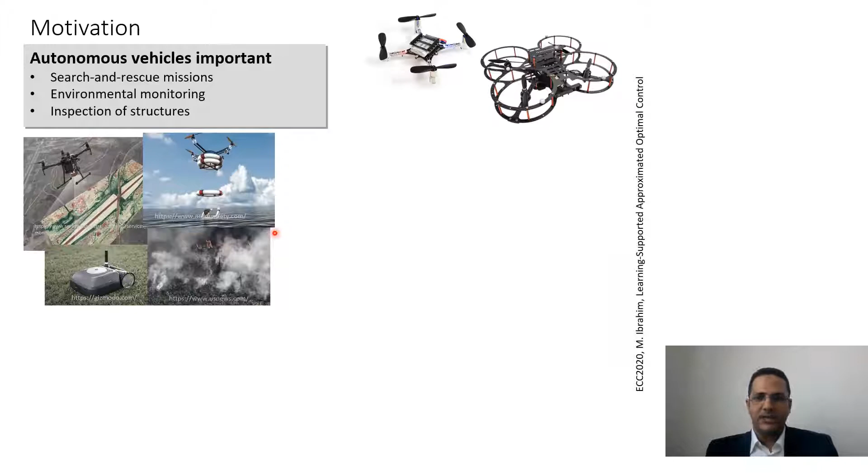Autonomous vehicles, for example unmanned aerial vehicles, are used for many important applications, such as search and rescue missions. For these missions, we need to minimize energy consumption due to battery limitations, while also taking into account vehicle dynamics and constraints. So we propose optimal control.

However, in these applications there are many challenges. As mentioned at the beginning, the common problem is disturbance, for example wind disturbance. Ignoring this disturbance might lead to instability of the control system, in addition to the low computational power of the autonomous vehicle. To consider all these aspects, we propose a learning-supported approximate optimal control approach. I will explain how these aspects are considered.

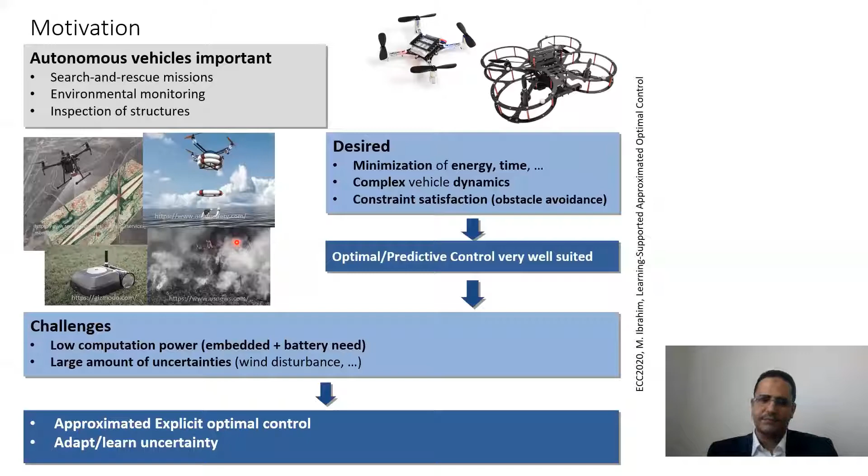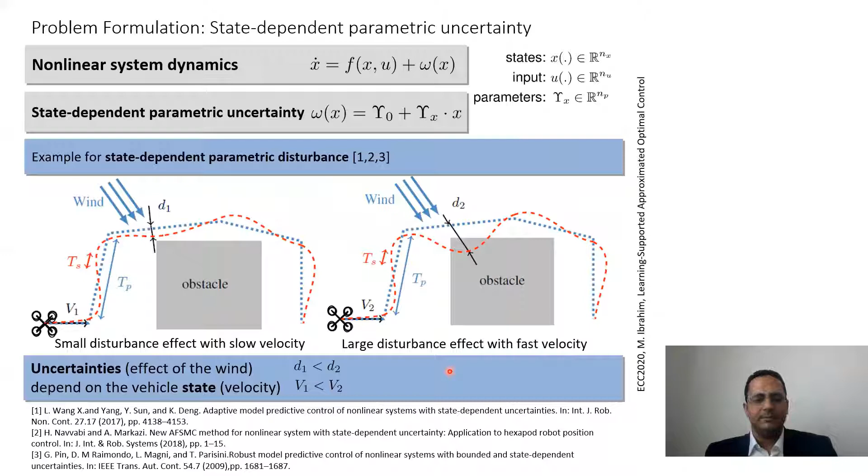In this work, we assume state-dependent disturbance based on a realistic scenario. For example, when the autonomous vehicle is moving with low velocity, the wind effect is less than when moving with fast velocity. So the disturbance depends on the vehicle velocity.

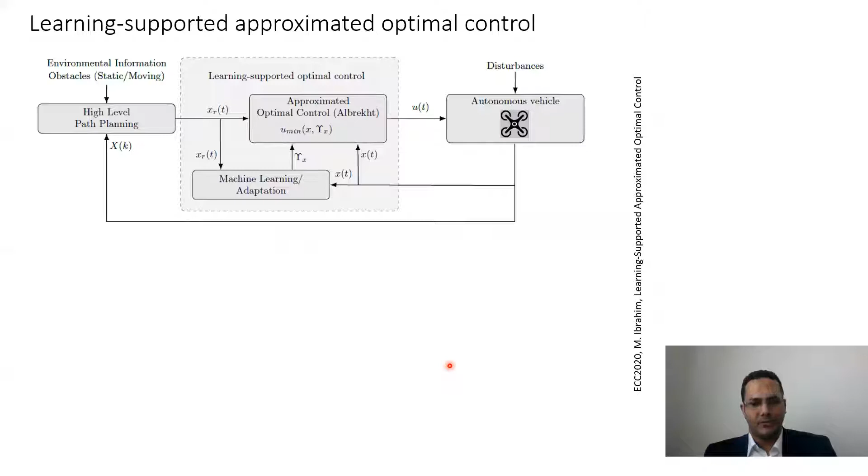To achieve all these aspects, we propose the learning-supported approximated optimal control approach. The main idea is to derive an explicit solution of the optimal control problem using series expansion approximation based on the Al'brekht method.

Considering nonlinear vehicle dynamics, this explicit solution, which is just a state feedback control law, is applicable for real-time implementation, and this control law can be validated. Also, to decrease the impact of disturbance, the controller is defined as a function of disturbance parameters, which are learned online. So how is this explicit solution of the optimal control problem calculated?

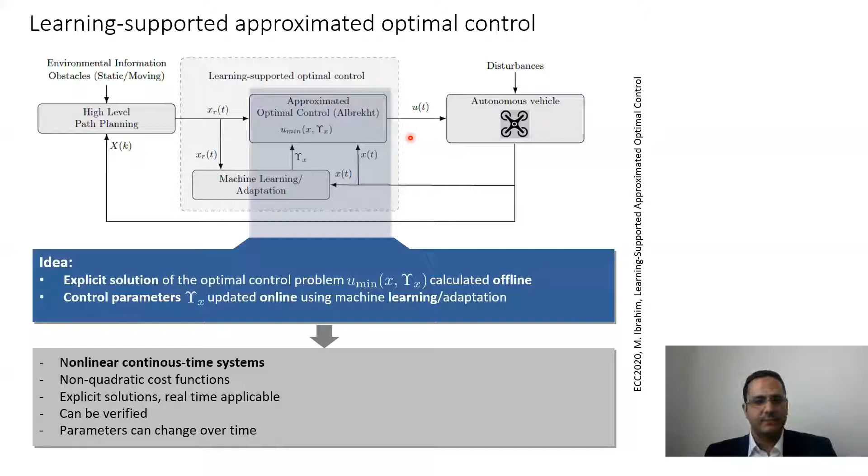Solving the optimal control problem is computationally expensive and challenging to implement on the autonomous vehicle. So we propose to calculate an explicit solution of the optimal control problem.

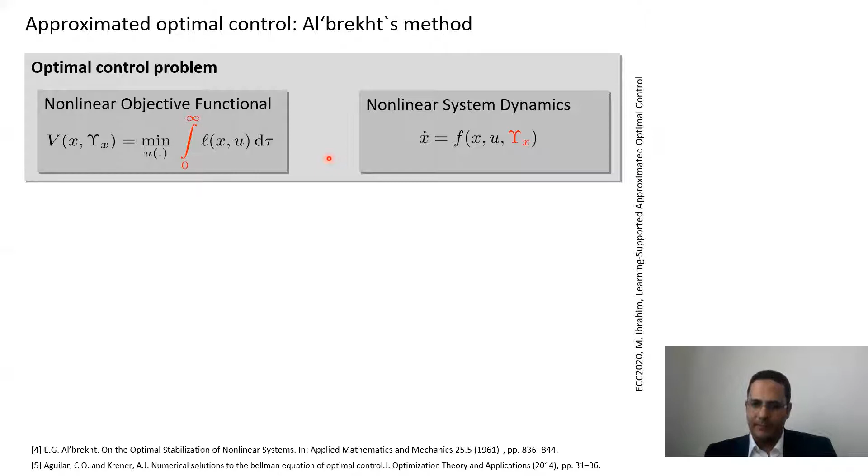Both the cost function and the vehicle dynamics are approximated using power series expansion based on the Al'brekht method, taking into account some conditions and assumptions. The solution accuracy depends on the approximation degree of the power series expansion. So how is this explicit solution calculated?

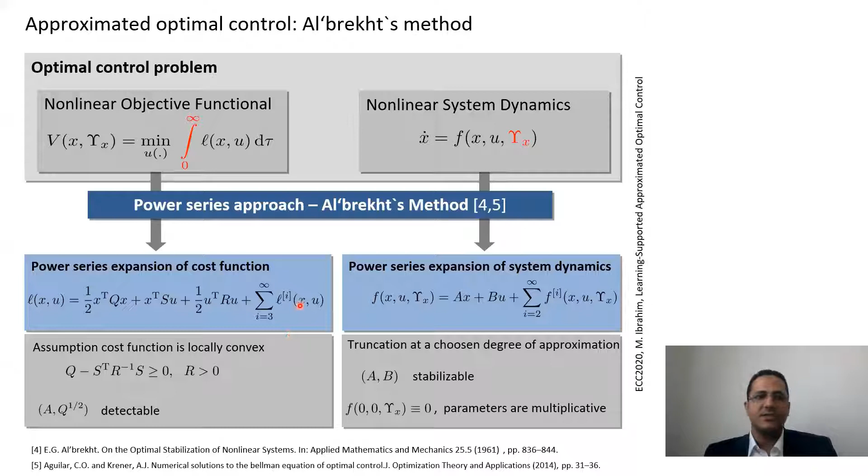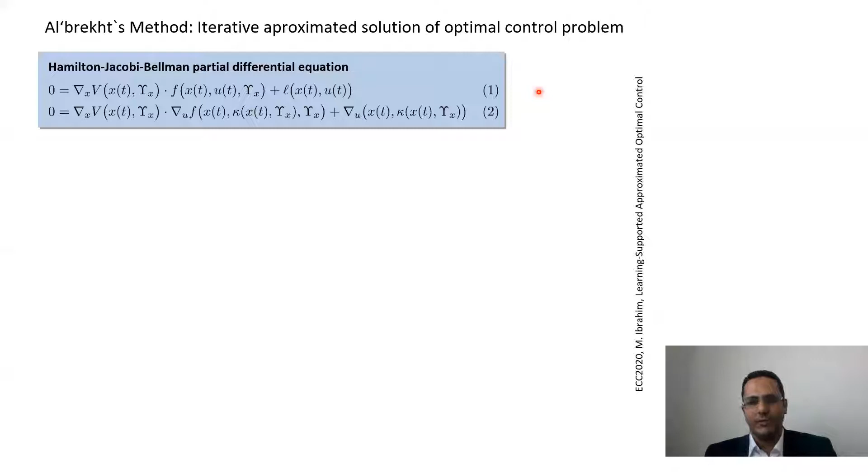First, both expansions are obtained using the Al'brekht method by solving, for each degree, the Hamilton-Jacobi-Bellman equation, equation one, and the first derivative of this equation with respect to the control law, equation two, assuming the control law and the optimal cost function are defined as a power series.

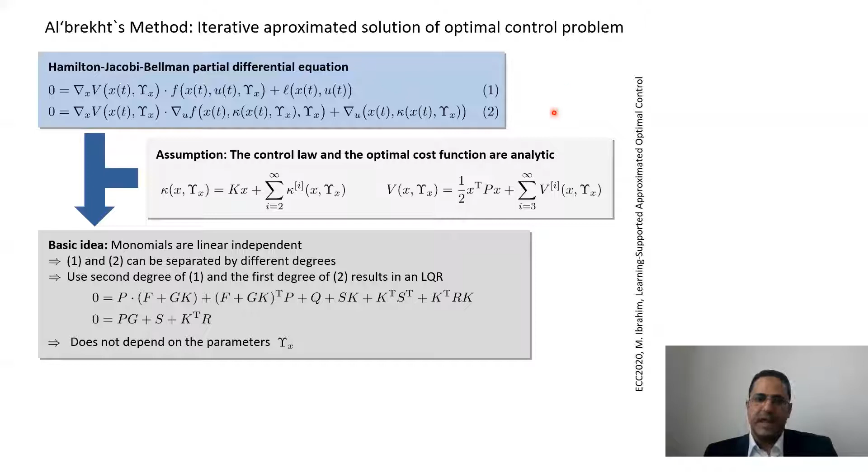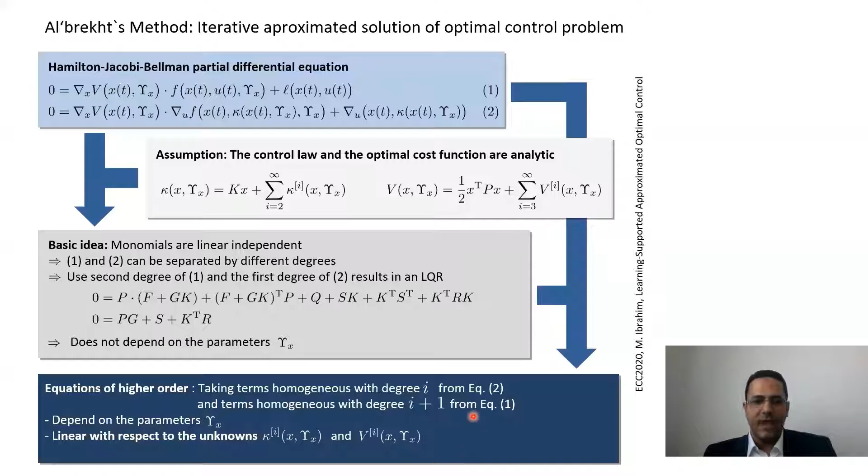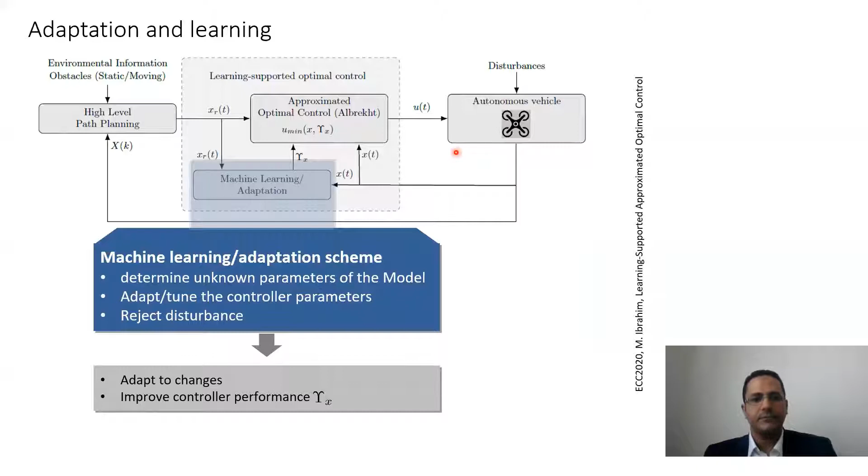So how does this controller update the unknown parameters online? We propose to use a machine learning scheme to determine the unknown parameters, to update the controller parameters, to reject the disturbance and improve the controller performance.

In this work, we propose state-dependent uncertainty, which is learned online using measurements collected during the mission. This data includes state measurements and control inputs at previous time steps, and the difference between the predicted and real state. In principle, we can use any learning approach to learn these disturbance parameters.

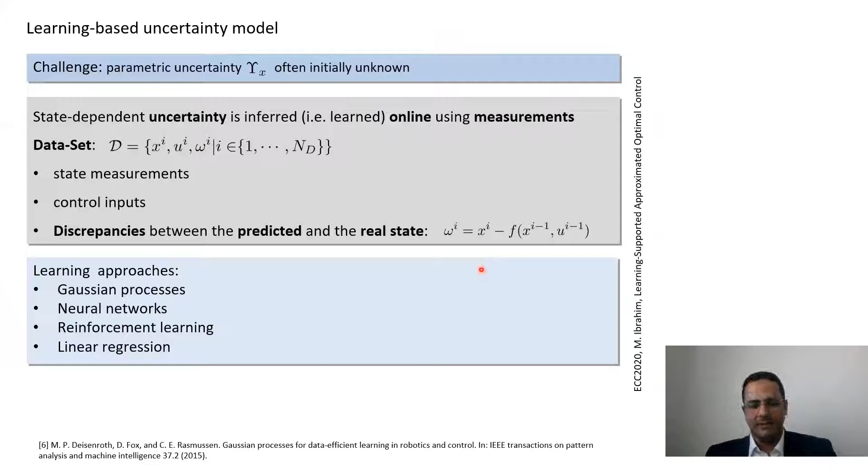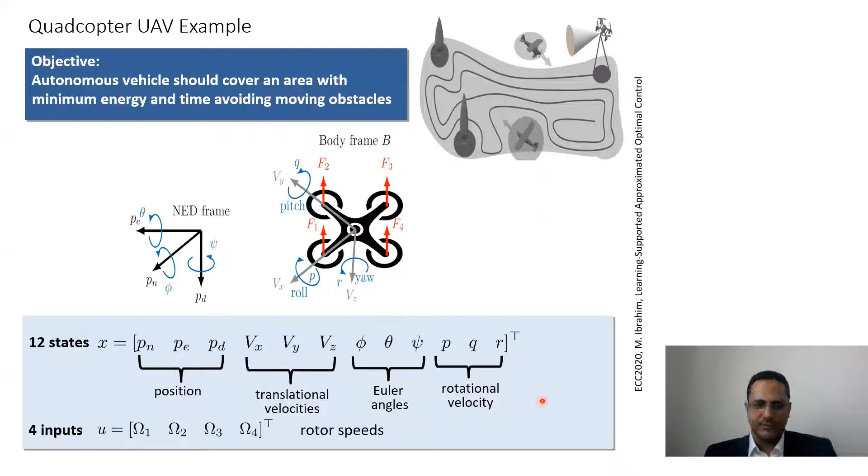To validate the robustness of the proposed control law, to learn and reduce the effect of external disturbance, we consider a quadcopter covering a known environment with different disturbance scenarios. In this work, the quadcopter is defined by 12 states and controlled using 4 rotors, with dynamics defined by a nonlinear model including navigation, kinematic, force, and moment equations.

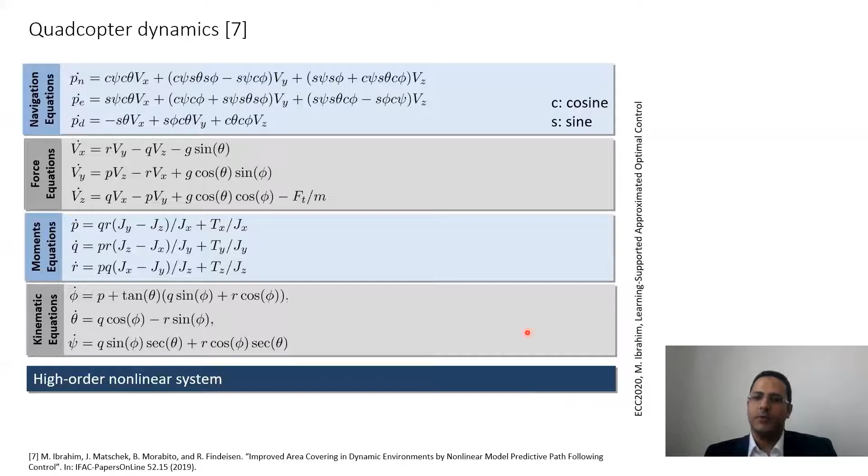Considering these nonlinear dynamics in optimization-based control is completely challenging. So, in order to make the approach computationally efficient for embedded implementation, we propose to use multivariate regression for learning the disturbance parameters online.

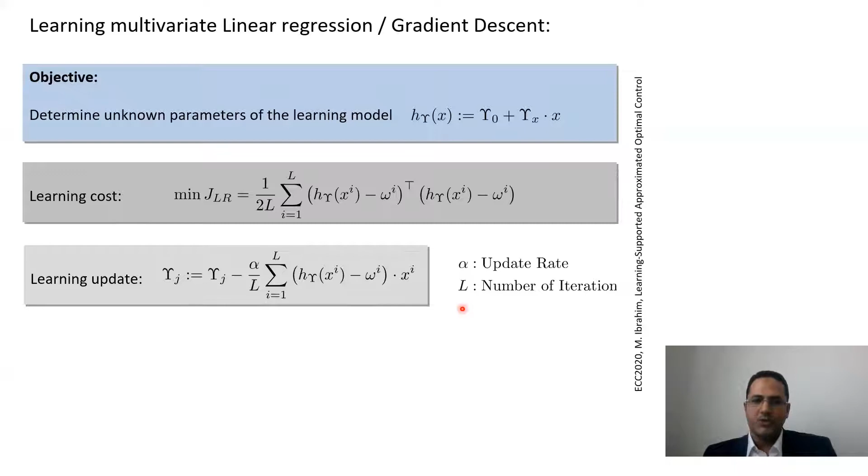We propose to use gradient descent to determine the unknown parameters of the learning model. The objective is to minimize the difference between the actual error and the estimated error. The parameters of the learning model are updated by this updating law, which tune the controller to reject disturbance and improve controller performance in order to track the reference more accurately.

Now we need to validate the proposed control law.

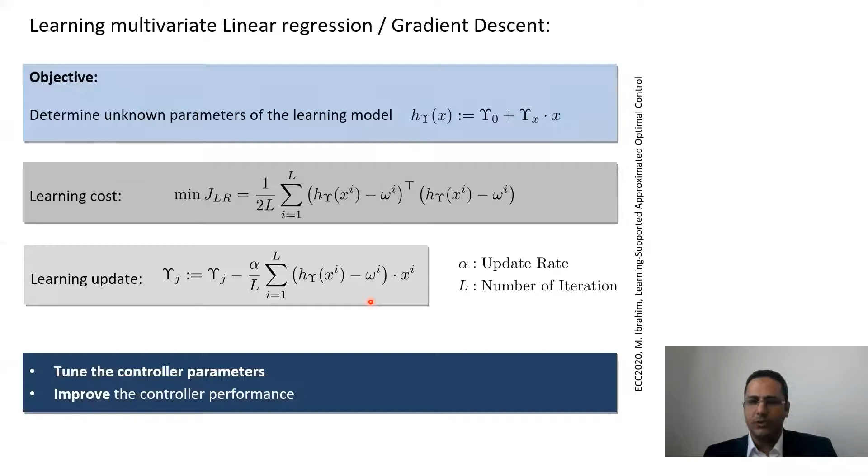First, we compare the first order approximation and second order approximation of the explicit solution of the optimal control problem. The difference is that the first order doesn't consider the disturbance parameters, while the second order considers them as tuning parameters. As we can see, the second order can alleviate the effect of wind disturbance, while the first order is more sensitive to wind disturbance, which might lead to collision with obstacles. So learning the disturbance parameters leads to safe flight and more accurate performance.

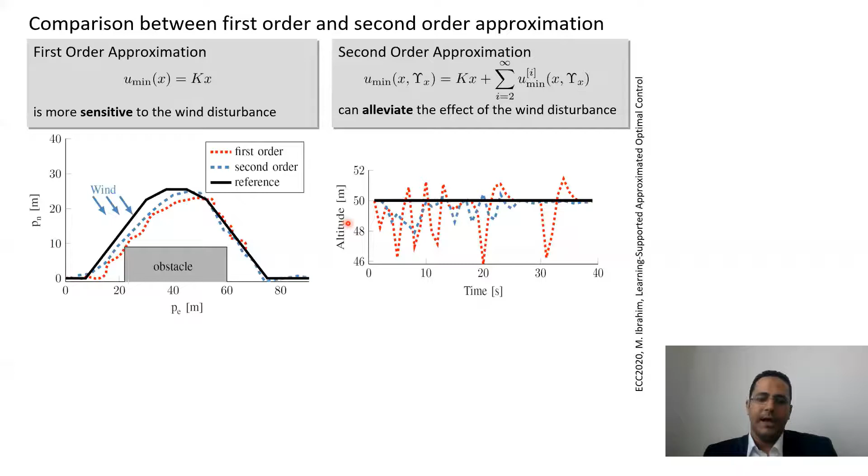Considering the nonlinear vehicle dynamics in the optimization-based controller, it's completely challenging to implement on an embedded system, so we need to test the real-time feasibility of the proposed control. As we can see, considering the nonlinear dynamics of the autonomous vehicle and the disturbance parameter of higher order approximation doesn't affect the computation time, which is around 11 microseconds.

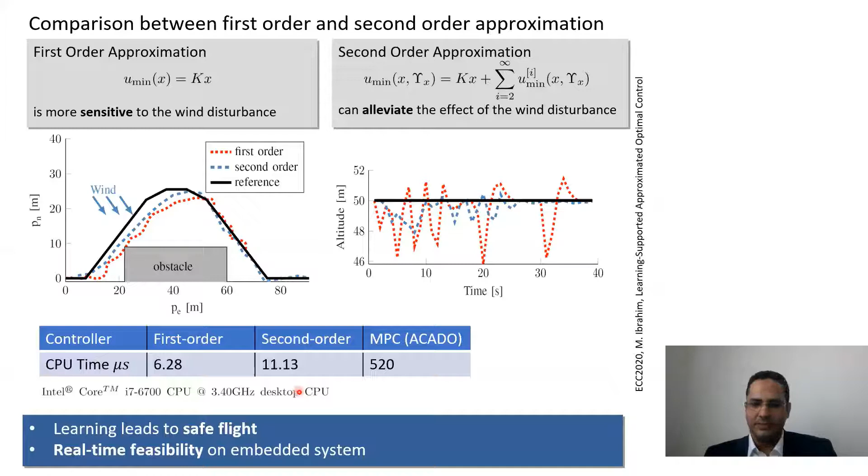For more validation of the robustness of the proposed control law, we ran 100 simulations with random wind disturbance. As we can see, the region of the actual path is reduced using the second order approximation, which addresses the wind effect as a tuning parameter, while the first order is more sensitive to wind disturbance, which might lead to collision with obstacles.

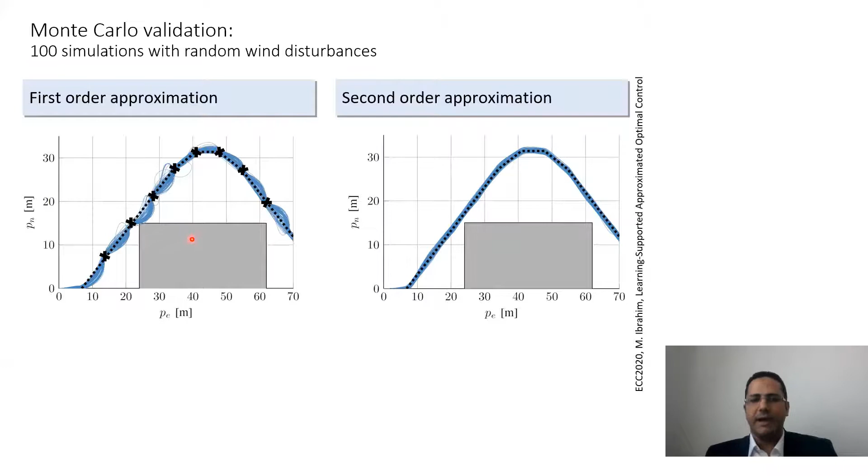As we can see, the average value of the root mean square error between the reference and actual path is about 2 meters using the second order approximation, which improves control performance more than 10 times compared to the first order approximation, which is around 25 meters.

So safe flight is ensured for all uncertainty scenarios without obstacle collision.

So now we need to validate this control law for a long time mission.

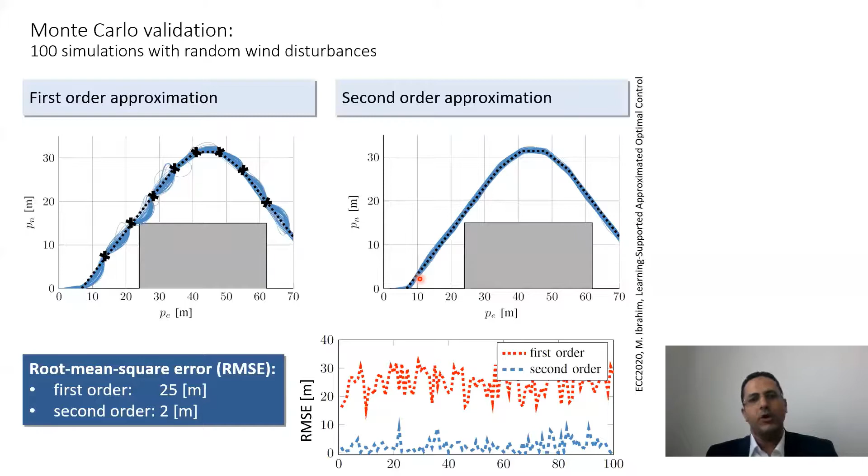We also validate the proposed control approach on a long mission, such as area coverage in a cluttered environment with different wind disturbance cases. In this work, we propose to implement a moving horizon planning approach using mixed integer linear programming to handle the environment dynamics and achieve the mission objective, such as area coverage with minimum energy consumption, taking into account vehicle dynamics and constraints that represent the capability of the autonomous vehicle to guarantee that the reference planner generates a feasible path.

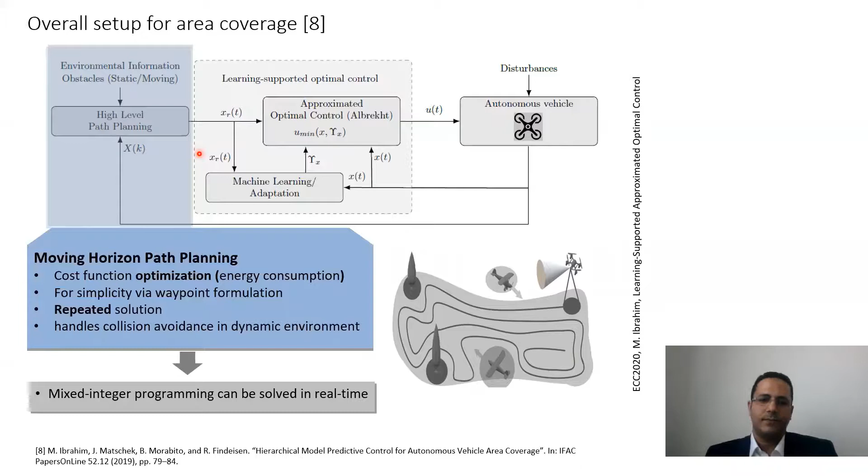In this scenario, the quadcopter is equipped with a sensor to cover a mission space while avoiding obstacles despite the wind disturbance.

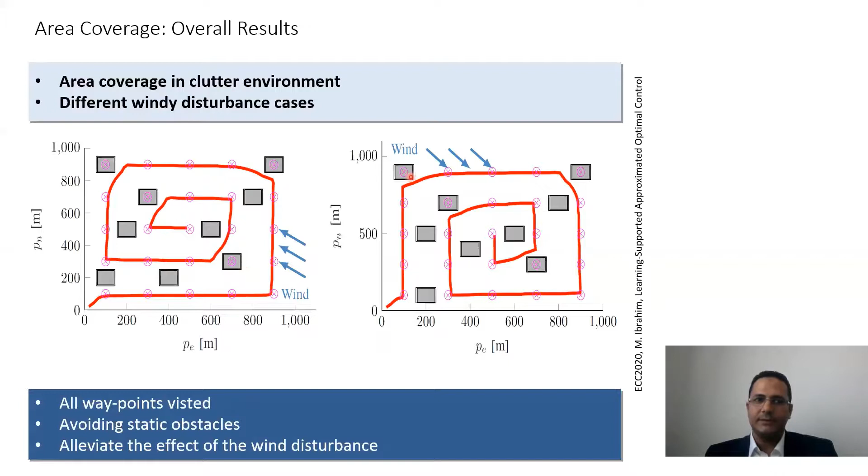So far, now to summarize the proposed control approach. Controlling an autonomous vehicle needs to achieve limited computational time demands and also needs to consider the nonlinear continuous time dynamics of the autonomous vehicle. Actually, it is difficult to implement and solve in real time.

So we propose to use an approximated explicit control law using the Al'brekht method. And we propose to use a learning scheme to learn the disturbance parameters to handle the disturbance and compensate the approximation errors in order to improve the controller performance.

This control approach can be implemented efficiently in real-time implementation. Also, this explicit control law can be validated using sum of squares method or set-based approaches.

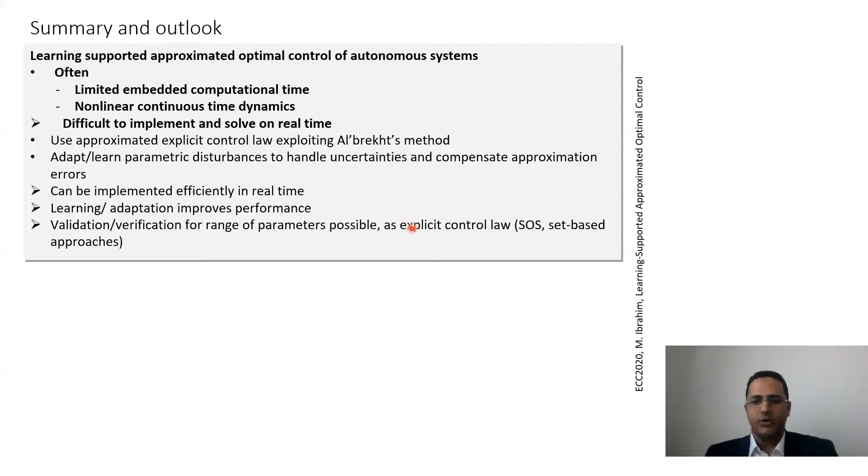We also proposed to use a moving horizon planning approach using mixed integer linear programming to cover an area with minimum energy consumption while avoiding obstacles, considering vehicle dynamics and constraints.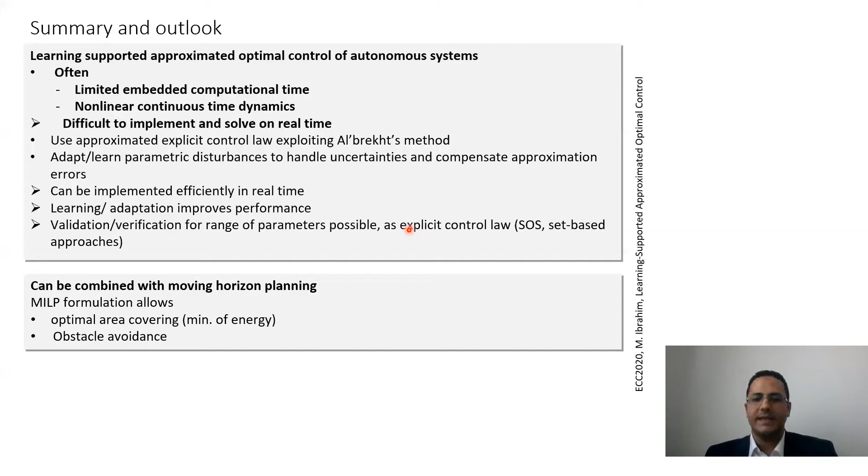Future work will include regional stability verification of the proposed control law. We can also consider a bidirectional interaction of the planner and the control, so the high-level planner can consider the capability of the low-level controller as a state-dependent uncertainty.

Future work will also include experimental validation of the proposed control approach. We can also consider cooperative area coverage using multiple vehicles.